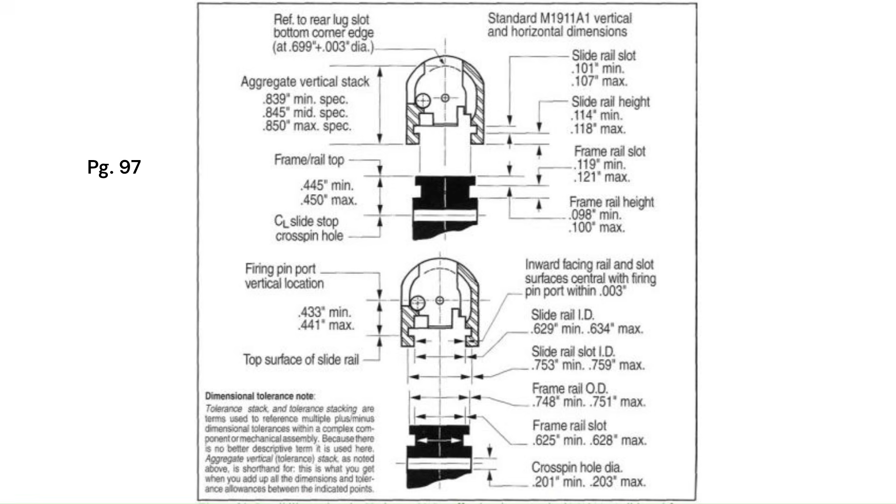I think a good place to start is to look at the original 1911 slide and frame designs and their dimensions. These dimensions all come from the M1911 book by Jerry Kuhnhausen. Here are the dimensions in question. They are given as upper and lower limits. This drawing is a bit busy. I'll simplify it. Let's take a look at the frame dimensions in question first.

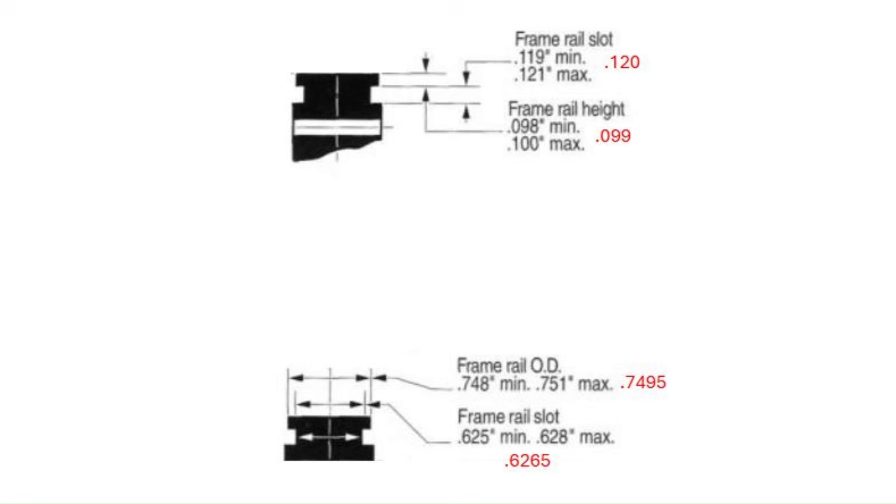I've created a 3D model representation of the 1911 slide and frame rail areas to help us visualize this. The dimensions are all at their nominal values I just showed. I made them different colors for clarity.

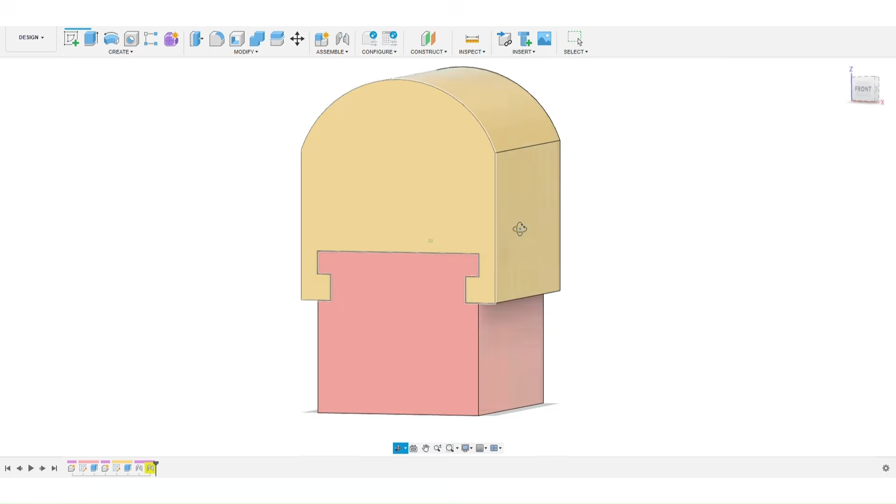Sorry, I didn't pick the colors. The software did, and we got salmon and baby shit yellow.

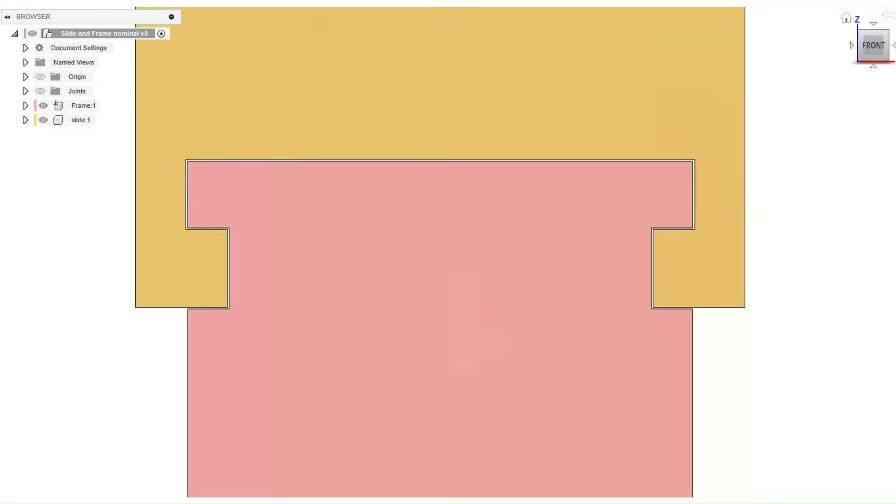There are 2 rail interfaces, this one and this one, which I will refer to as upper and lower. Slide to frame clearance will have a vertical and horizontal component, and we are only going to consider these clearances in 2 dimensions for the time being. Initially, I've constrained the model to show even gaps on all sides of these lower rails.

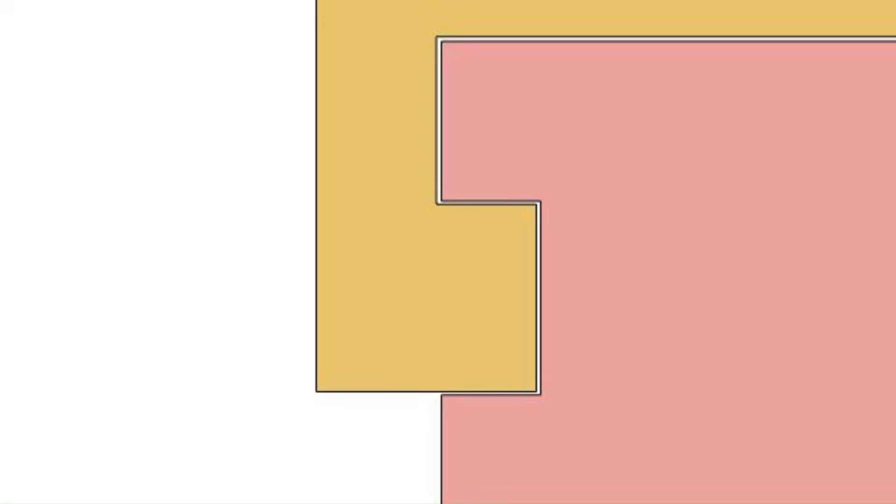As far as I can tell, when talking about slide to frame clearance, it is given as total clearance, not clearance per side. In this case, the total clearance of the lower rail would be the sum of these 2 gaps in the vertical direction and these 2 in the horizontal direction. I'm focusing on the lower rail interface for a reason that I will explain shortly.

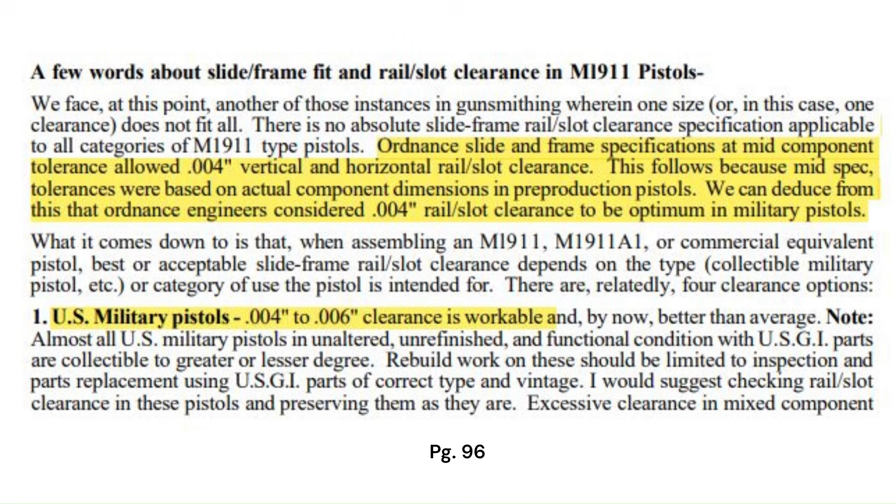At the nominal dimensions, this vertical gap is 2 thousandths, giving us a total clearance of 4 thousandths. This horizontal gap is 2.75 thousandths, giving us a total clearance of 5.5 thousandths. These nominal clearance values are in line with what is presented in the Kuhnhausen manual for an ordnance specification military 1911 pistol.

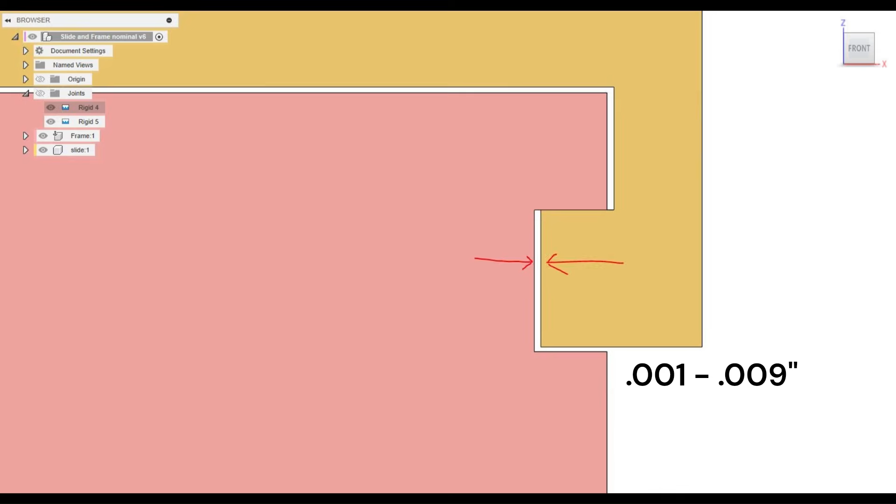Now I have constrained the slide and frame in a way that shows total clearance for clarity. The slide is pushed up and all the way to one side. The vertical clearance range at this lower rail is 1 to 7 thousandths. The vertical clearance range of this upper rail is 1 to 9 thousandths. The horizontal clearance range of the lower rail is 1 to 9 thousandths, and the horizontal clearance range of the upper rail is 2 to 11 thousandths.

I played with the dimensions of the slide and frame rail models within their tolerance range, and I found that in an extreme case, the upper rail can dictate the slide to frame clearance in both the vertical and horizontal directions. However, the clearance ranges of the lower rail are narrower than the upper rail, so I'm under the impression that the lower rail interface is what is designed to dictate the fit and clearances of the slide and frame in the original design. I could be wrong, that's just my interpretation of these dimensions. That's why I was focusing on the lower rail just a moment ago.

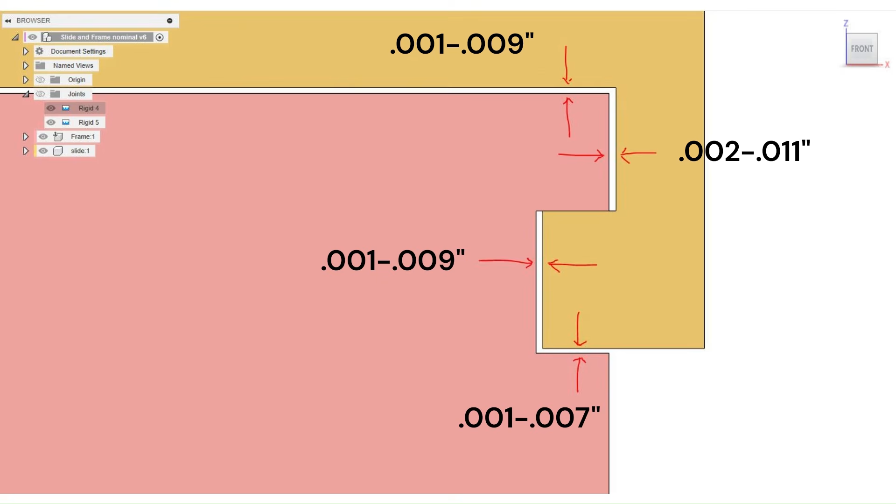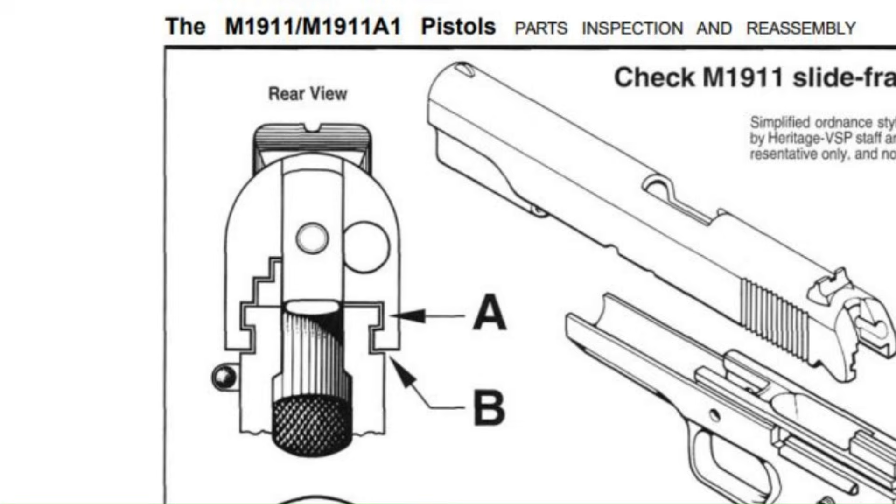There's one measurement method described in Kuhnhausen where feeler gauges are used to measure the horizontal and vertical clearance. Putting a feeler gauge between the bottom of the slide and the top of the frame, as shown at position B, would push the slide up, and the clearance measured by the gauge could be dictated by the vertical clearance at the upper or lower rail.

Putting modified feeler gauges in the 2 positions labeled A would show the minimum horizontal clearance, and presumably the minimum clearance could show up at the top or bottom rail interface. It seems to me when taking measurements of the rails and calculating clearances, the fit of the slide to frame would just be the minimum clearance measured in the horizontal or vertical direction, regardless of which rail interface that minimum clearance shows up at.

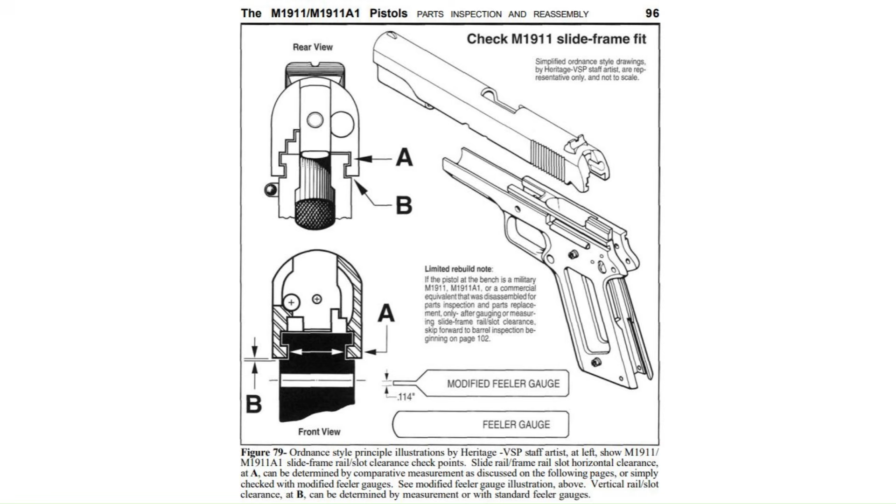There is a discussion that could be had about the tolerance stacking of all these dimensions in the horizontal and vertical directions. The vertical tolerance stack is the only one mentioned in the Kuhnhausen manual.

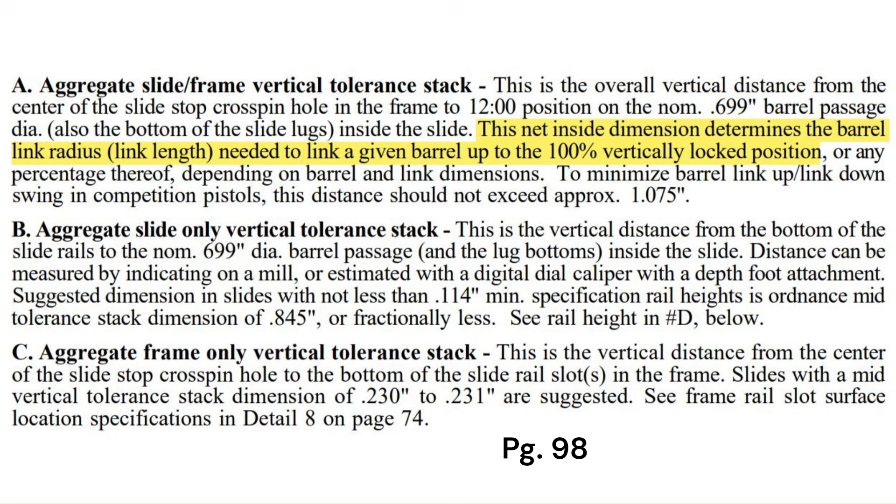It is not mentioned in relation to the clearances we are discussing, but the needed barrel link length in the upper barrel lug engagement. And I think that's kind of outside the scope of this video. So what should these clearances be in the horizontal and vertical direction?

Well, it depends. We have seen the range of clearances that would be deemed acceptable based on the original ordnance specification tolerances. I will be sharing some clearance ranges based on the application of the pistol given in the Kuhnhausen manual because they seem reasonable to me. Before that, I want to share this very important quote. There is no absolute slide frame rail slot clearance specification applicable to all categories of M1911 type pistols.

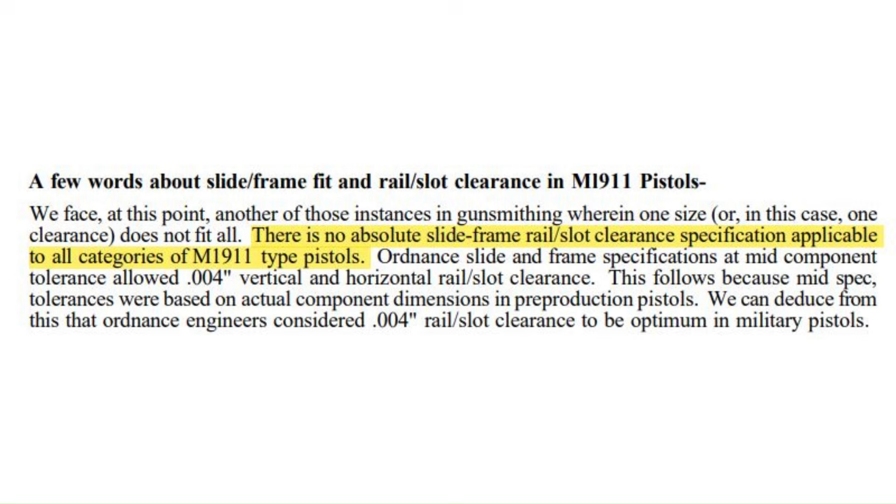These clearance ranges apply to both the horizontal and vertical directions. 4 to 6 thousandths for military and ordnance specification commercial 1911 pistols. Pistols for bullseye competition use might have clearances of 1/1000th of an inch or less. Pistols for other competition use may have clearances from 1 to 1.5 thousandths. Point number 4 seems a little vague to me. I will share my interpretation.

If someone is assembling a 1911 pistol and they want the fit to be improved or better than the nominal clearance associated with ordnance specifications, a slide to frame rail clearance of 1.5 to 2 thousandths is suggested. When I hear the words carry pistol, I think of a concealed carry or duty pistol that someone is going to trust their life to. If that is the case, I would argue that this clearance range would also suffice for general use pistols.

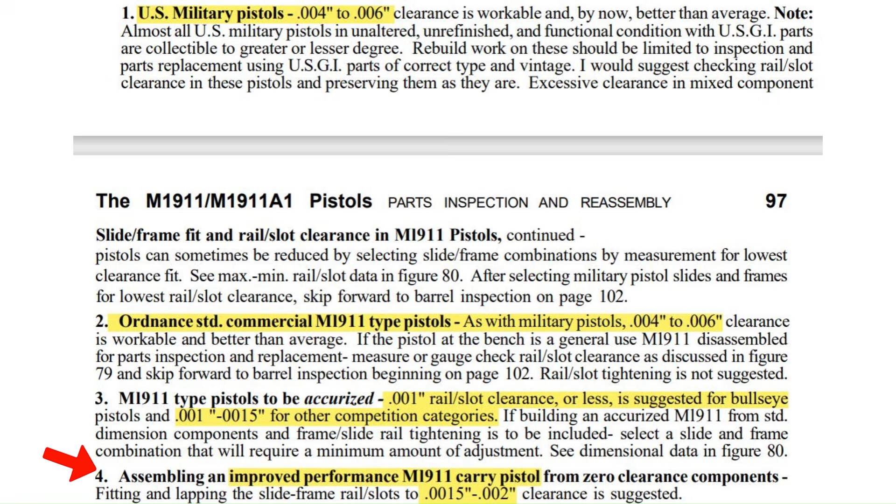For the sake of simplicity, we have been considering these clearances in 2 dimensions and have made various other assumptions. To get an accurate idea of the clearances and how much they vary, measurements would need to be taken along the whole length of the slide rails on both sides of the slide and frame. Horizontal clearances and the position of the slide on the frame can affect firing pin placement on the primer, how cases interact with the slide and extractor as they're stripped out of the magazine, and where the ejector contacts the case rim as the slide moves rearward.

In addition to all that, the vertical clearances can affect barrel lug engagement and lockup, the needed barrel link length, disconnector function, and how the barrel lugs contact the vertical impact face in the barrel bed of the frame. There are likely some consequences of the slide to frame fit that I am also not aware of.

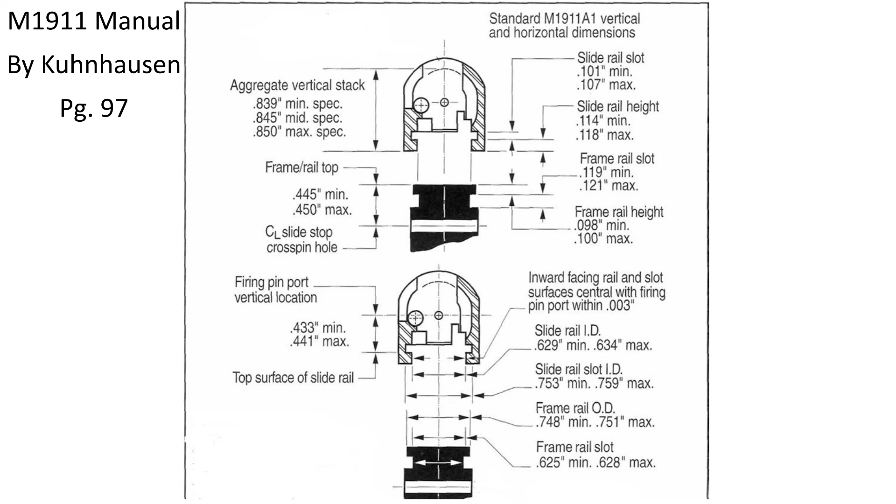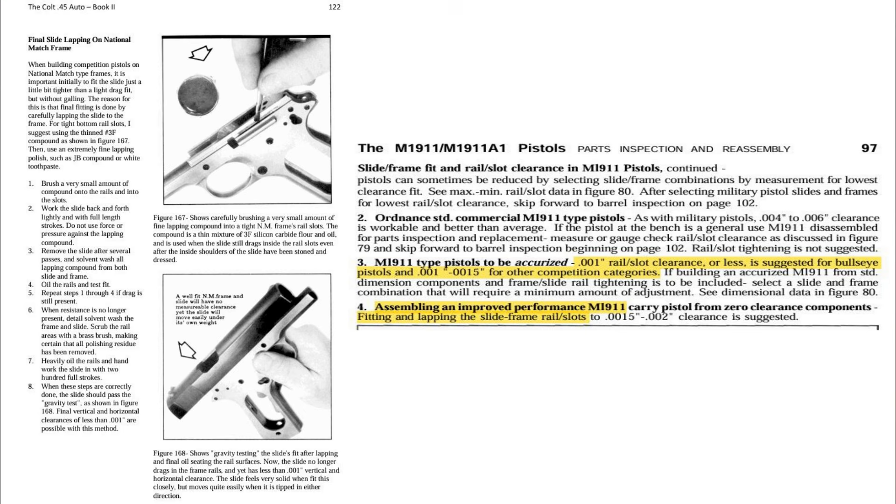It seems the best way to achieve an improved slide to frame fit for an Accurized 1911 is to fit and lap the slide in from zero clearance components. Starting with a slide and frame that have oversized rails, the location of interferences must be determined. Rail material must be removed until a near zero clearance or line-to-line fit is achieved. Kuhnhausen calls this a little bit tighter than a light drag fit.

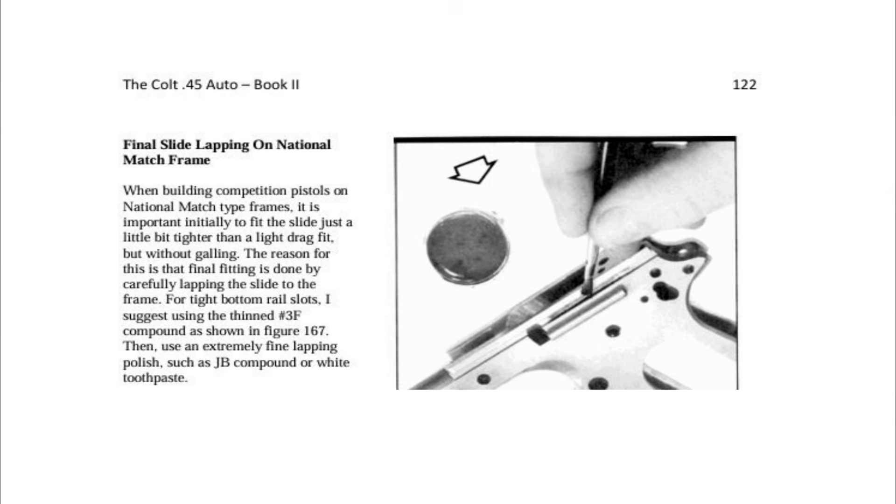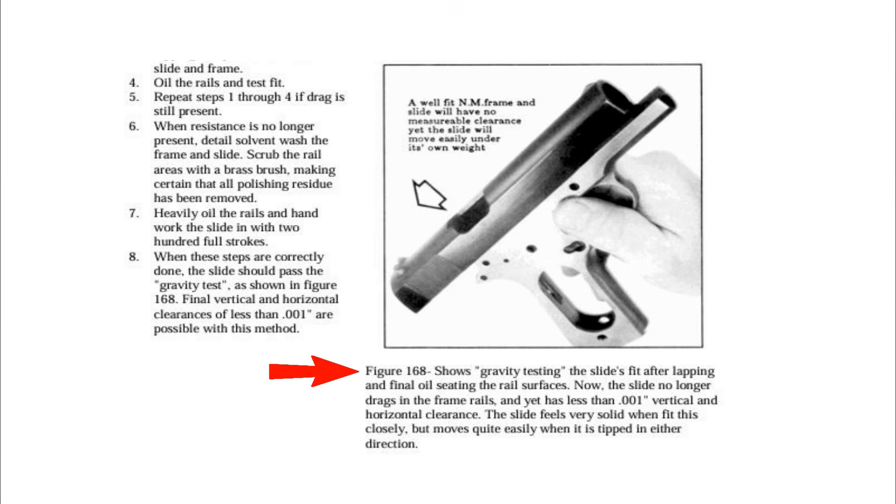There will be minimal additional material removal with finer media until the slide and frame get to a light drag fit and then can be lapped in. After this process, the slide will move freely under its own weight, but there will be little or no perceptible play. The total horizontal and vertical clearance in this condition will be less than 1/1000th of an inch.

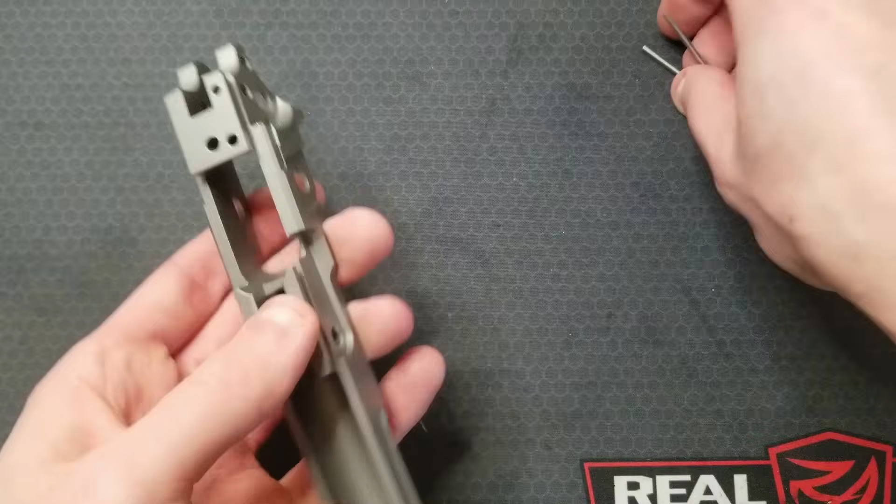Before taking any measurements, I made sure to thoroughly inspect and deburr the slide and frame rails. There really wasn't much to do. Frame rails, easy to measure with calipers. Measure in a few spots all along both rail sections. The frame slots, I put 90 thousandths gauge pins in the slots and measure across those gauge pins, and then I subtract 180 thousandths from that measurement, and that will give me my slot width.

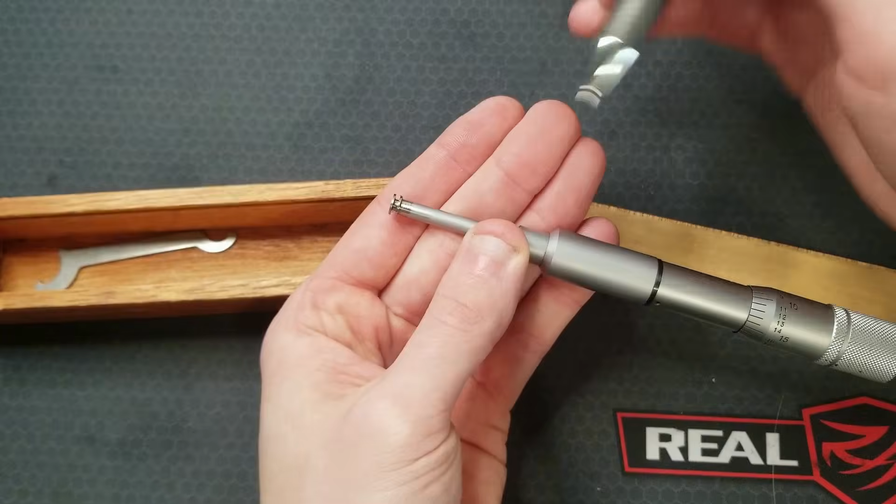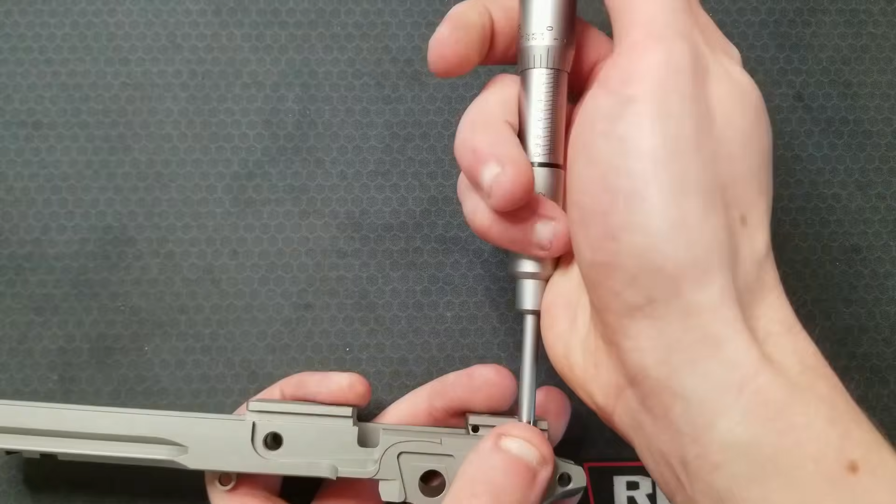This is a groove micrometer. It has these little discs and it measures grooves inside and outside very accurately. You can get into places where you couldn't get otherwise. It measures 0 to 1 inch in 1/1000th of an inch increments. Measuring the slot height. So 15. Okay, so 50 plus 15 is 65.

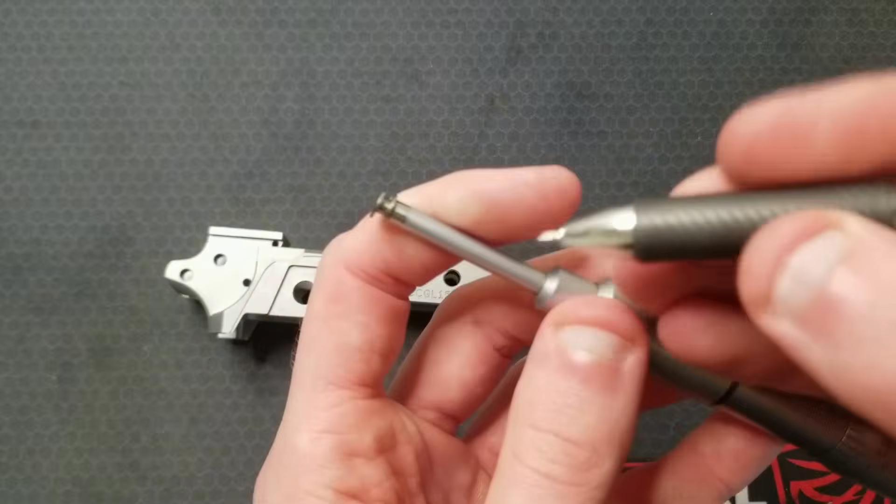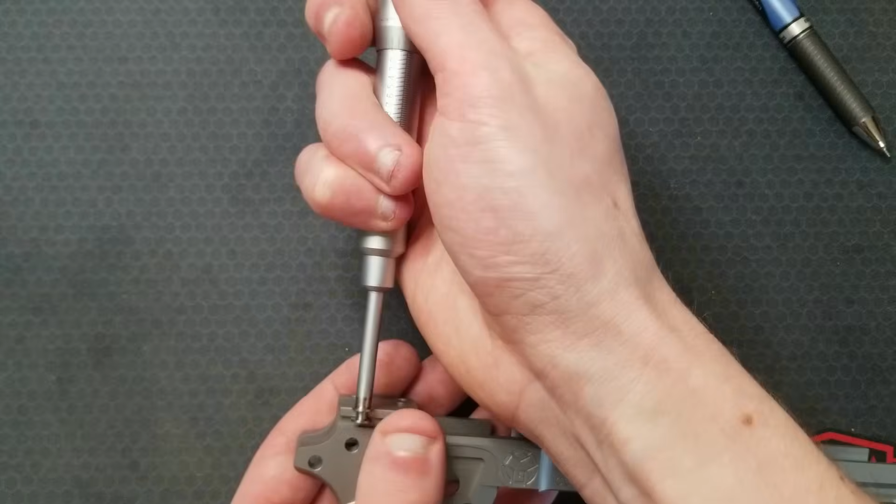I'm going to measure more points along both rail sections, and since I'm measuring between here and here, I have to take into account the thickness of these two discs. They are 25 thousandths each, so I have to add 50 thousandths to that measurement, which gives me 115. Now I can use these to measure my rail height too. So that is 99 and a half.

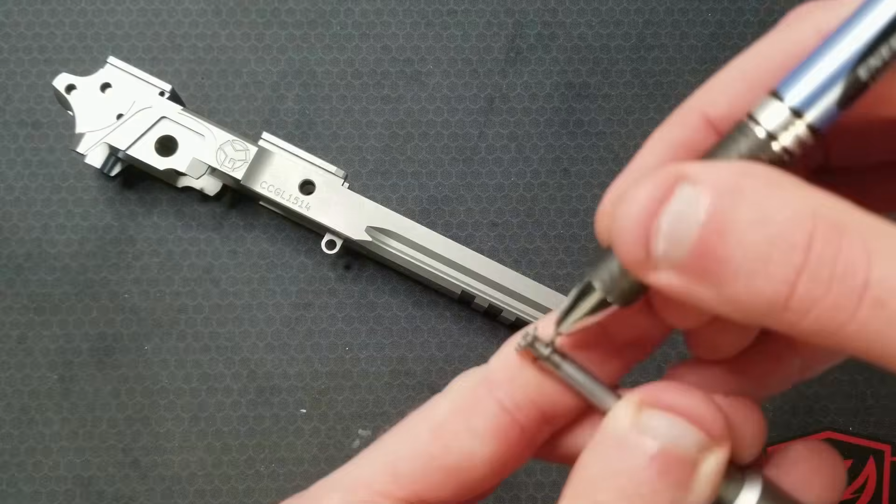That one's closer to 100. And since I'm measuring between the two discs, I don't have to account for the thickness of the discs in this case. I'm going to measure up the slide in the same way.

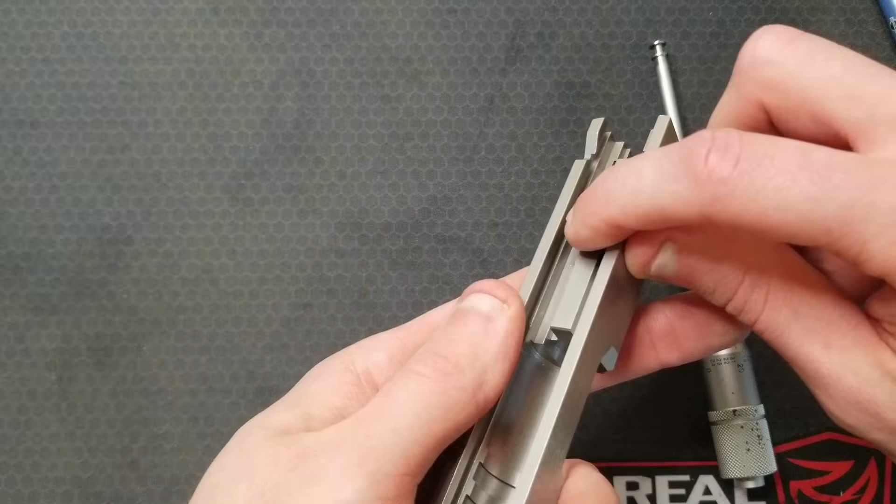Groove mic to measure the slot and rail height, and then the inner rail width here I can get with my calipers. And then I will be sticking my gauge pins in this slot and measuring between them with my calipers in here. But in this case, I will have to add 180 thousandths to my measurement to get the inside slot width. I've made myself a couple of handy little visual data sheets.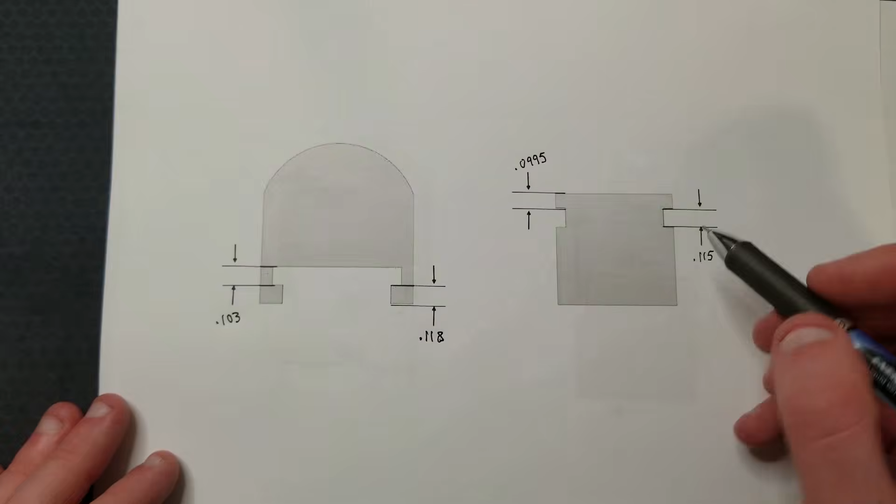My vertical interference is coming from here and here. This is 3.5 thousandths wider than this, so there's going to be clearance on this upper rail and slot. So that means to get to my line-to-line fit, I need to take 3 thousandths off of this rail.

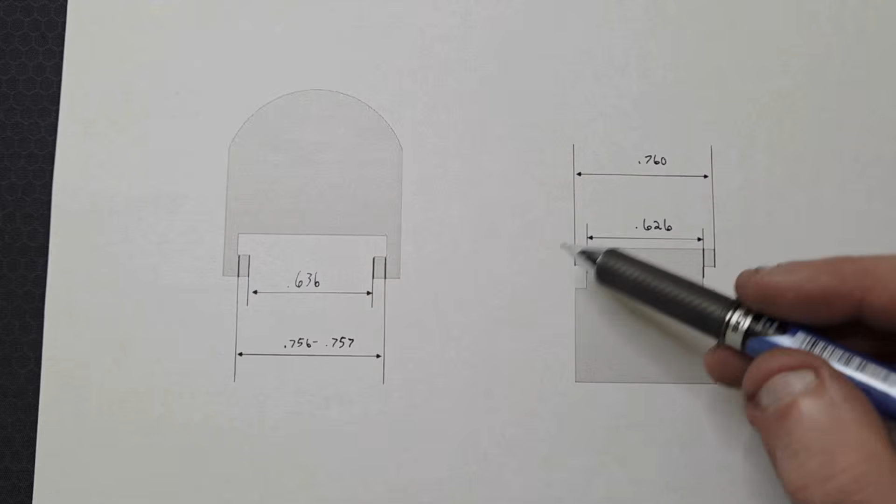Looking at my horizontal measurements, I have plenty of clearance between this slot and this rail. My interference shows up at this upper rail and slot. I have 3 to 4 thou of interference, or 1.5 to 2 thou per side.

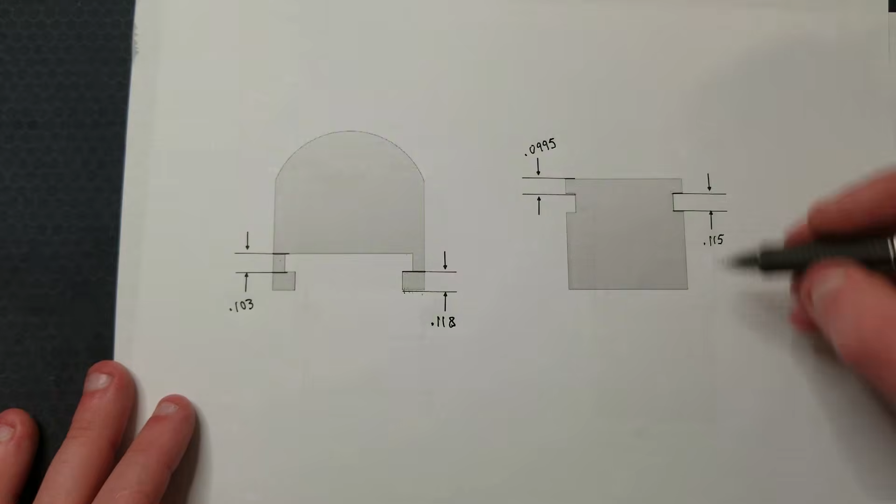Looking at where to remove material, it's going to be easier to take it off here and here than from in here and in here. Similarly, it's going to be easier to remove material from this face, the bottom face of the slide rails, than trying to open this slot up.

On page 100 in the M1911 Kuhnhausen manual, they point out the same areas to be adjusted when fitting a slide in a frame from 0 or near 0 clearances, adjustments at 1 and 2 for the vertical clearances, and at positions 3 for the horizontal clearances.

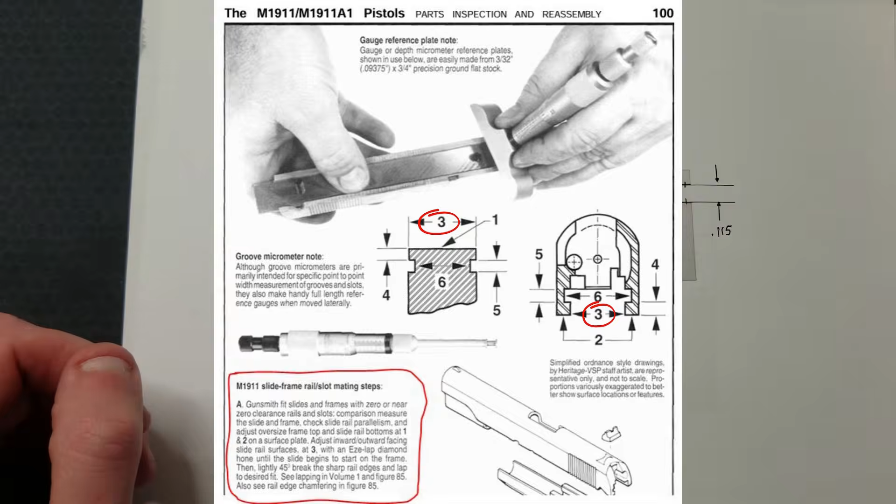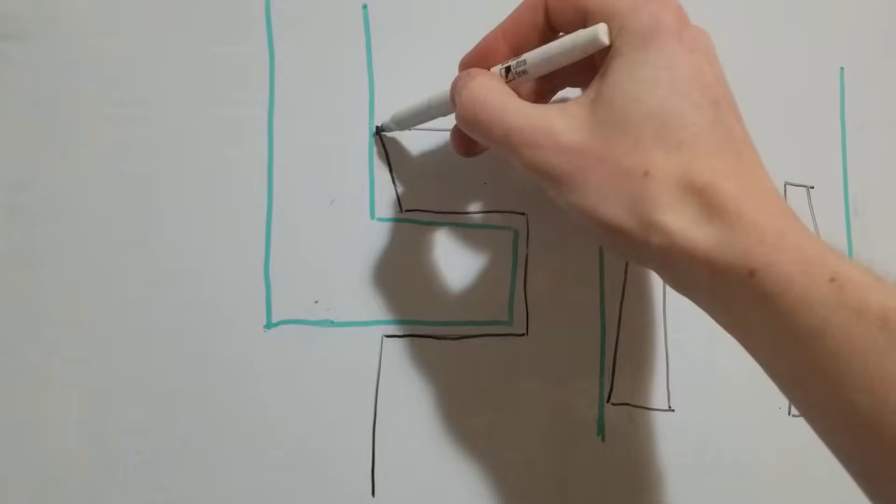As I'm taking any material off these rails, I want to make sure that they stay square and parallel. If I don't, we might have a weird taper or something like this on one of the rails, and then it's only going to be contacting at this little point, and it will wear off super quickly and your clearances will open back up. What we want is the rails to be square with each other to make sure we maximize bearing surface and minimize wear, and make sure those clearances that we've established stay that way for as long as possible.

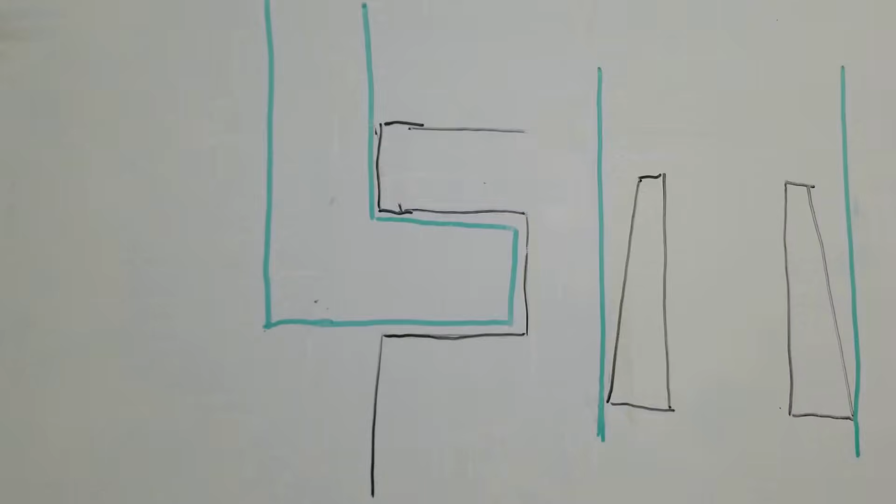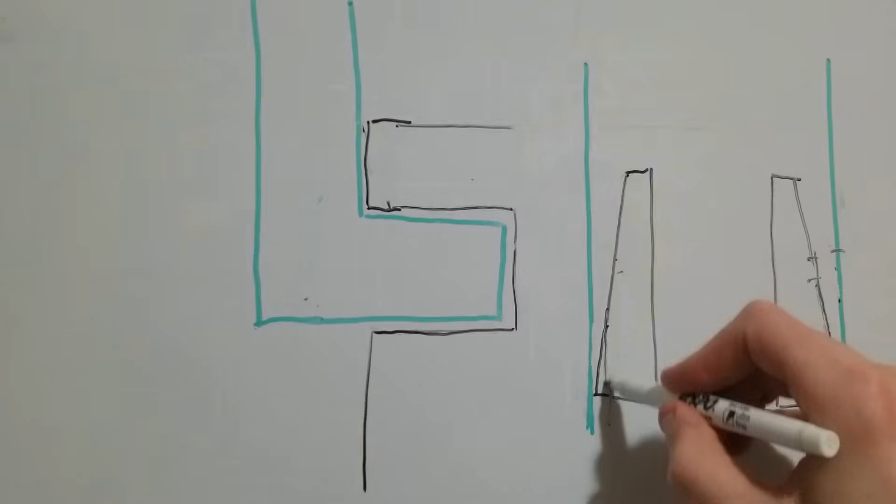Let's consider this a top-down view of the rails, and similarly, if this rail surface isn't parallel to this rail surface and these rail surfaces aren't parallel to the slide slot, then you're going to have high spots somewhere that are going to wear off really quickly and your clearances are going to open back up.

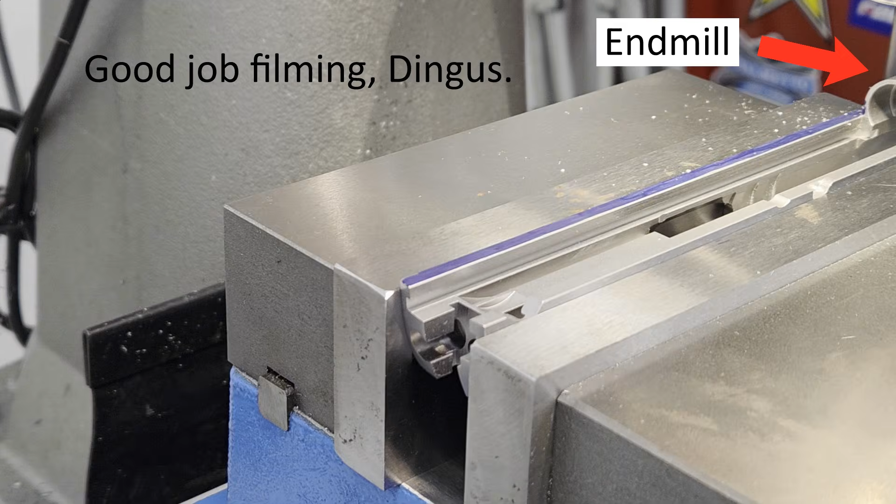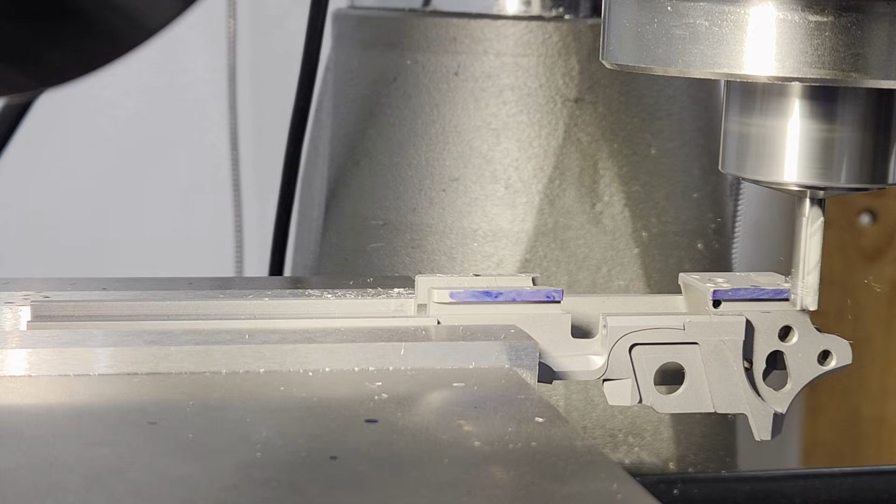I have removed all the slide and frame rail material before by hand. This is difficult, very time consuming, and can result in unevenness across the rail surfaces. I would highly recommend machining most of the material off and leaving yourself about 1 thou to do by hand at each rail surface.

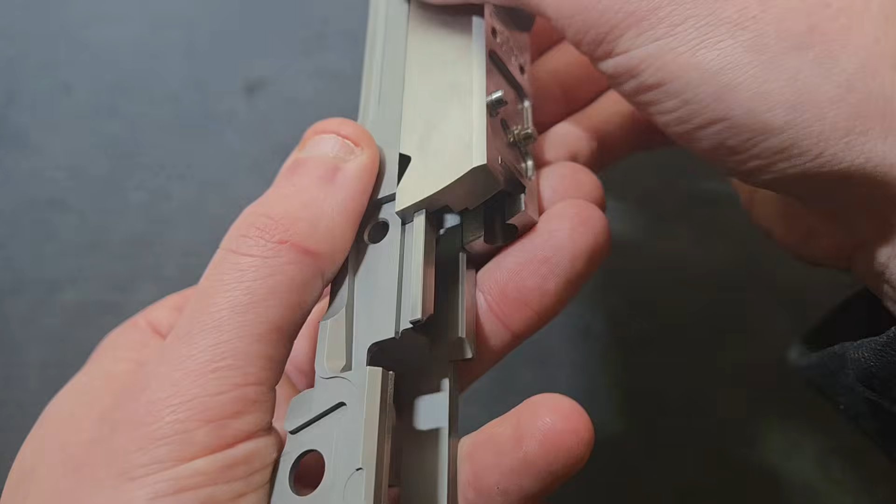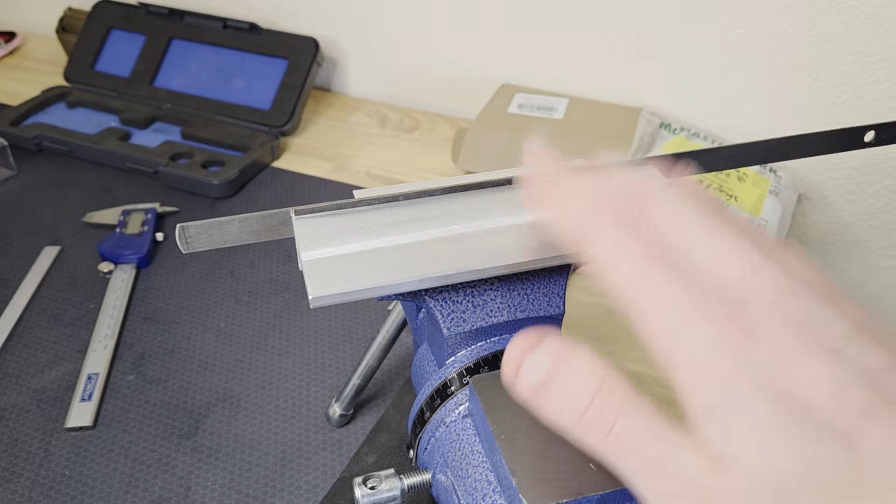I started with a 400 grit equivalent stone on the slide rails until I could get the slide on past the taper of the front rail section, so I knew that when it stopped again, my frame rails were interfering with the slide slot. I made a fixture or a jig for taking material off the frame rails.

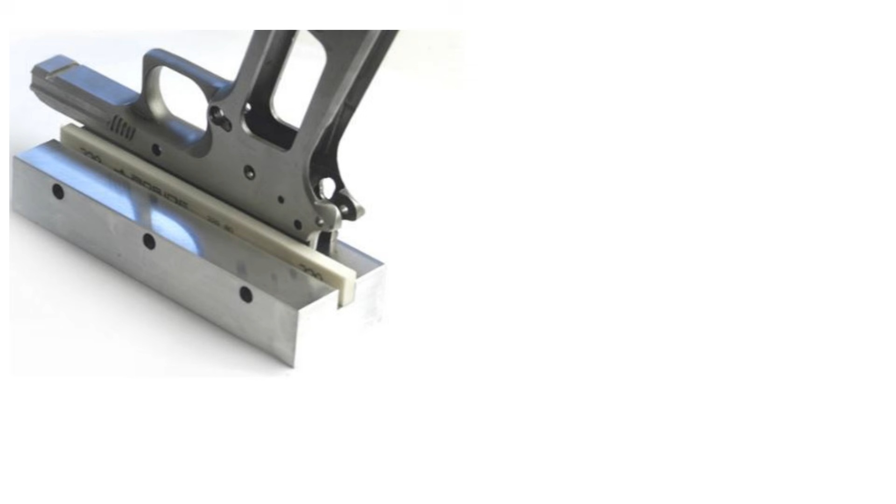I started with some extruded aluminum angle stock, then machined one leg so it just replaces one vise jaw. I have a straight edge and a piece of sandpaper clamped in here. It's only sticking up high enough to contact the frame rails. Companies like Matrix Precision and Everglades Ammo sell jigs like this.

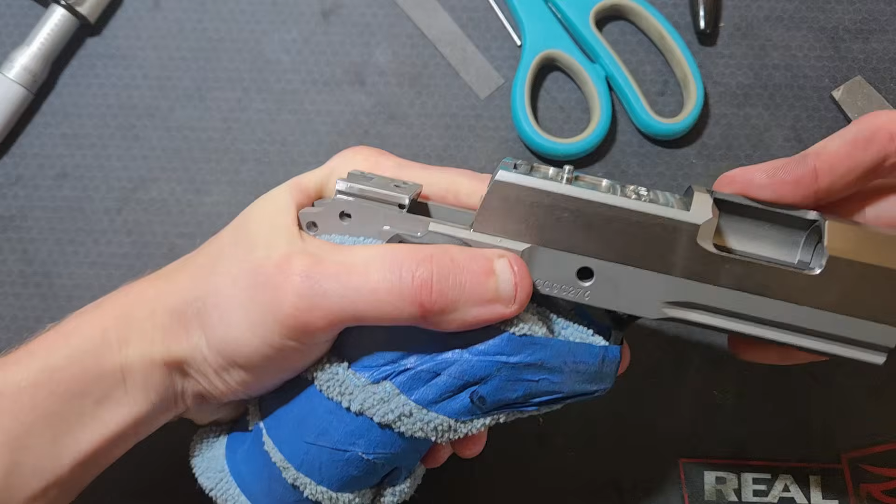At this point, I used 400 grit sandpaper in the jig I made to start removing frame rail material. I went back and forth between stoning the slide and removing frame rail material until I could get the slide all the way on to the front rail section. Then I switched to taking slide rail and frame material off with 600 grit. I went back and forth doing this until I could get the slide all the way on both rail sections.

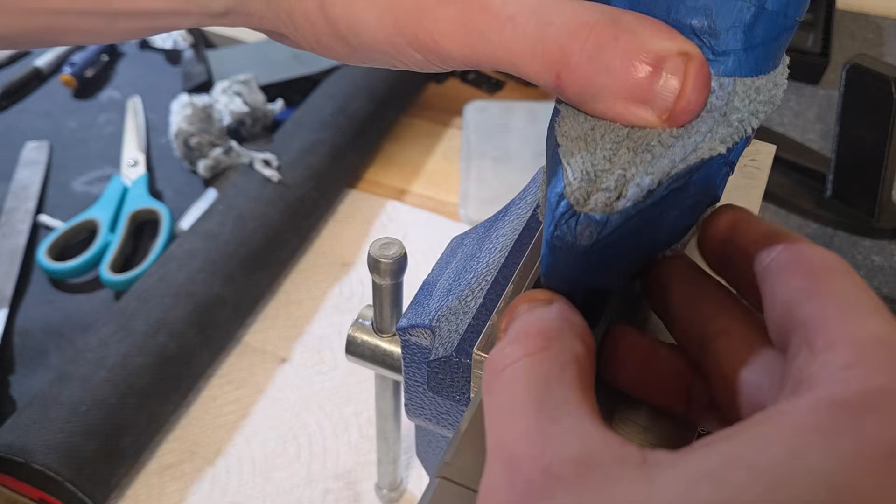At this point, I switched to 1000 grit sandpaper for both. I kept working both rails very carefully and trying to fit the slide back on, but left the slurry created by the oil and the 1000 grit sandpaper on the rails, so it was lapping it in as I did this. And before long, the slide was fit how I wanted. I wiped off the slurry and oiled it up to see how it felt. Like glass, baby.

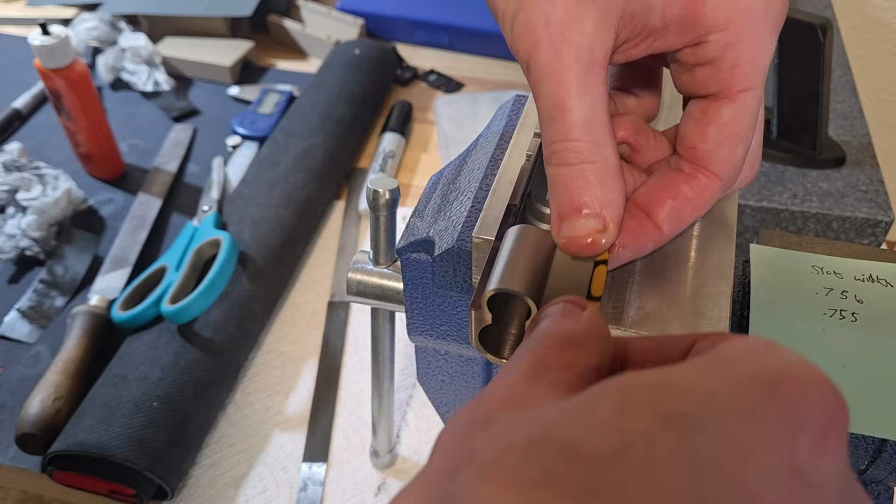Then I removed the little bit of material left by the spring plug tunnel that I didn't touch when I was taking my material off here. I did this with 600 grit sandpaper wrapped around my file.

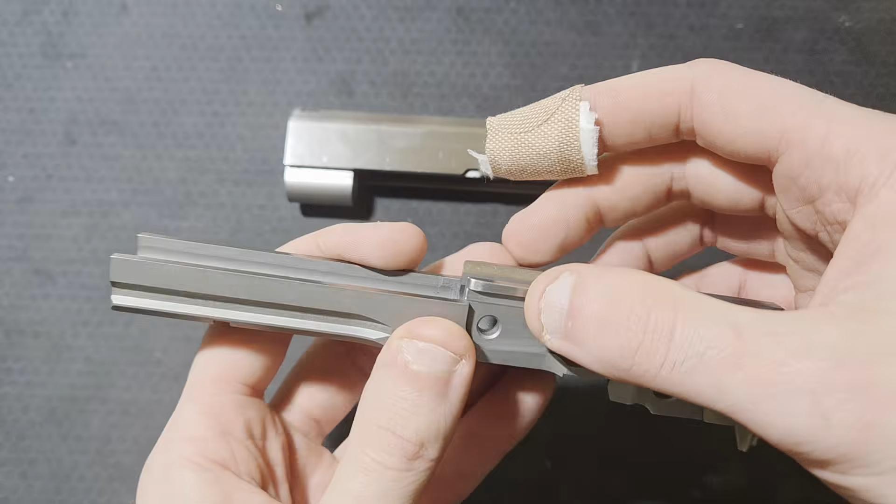The last thing I'll do is go around and break any sharp edges, deburr stuff from the machining and fitting process, reestablish chamfers and radii as needed if they went away on the corners of these rails from the material removal. I'll also take some alcohol and a stiff bristle nylon brush and scrub down the rail surfaces really good to make sure I don't have any residual particles from that last lapping process with the 1000 grit sandpaper and oil left in the frame rails somewhere.